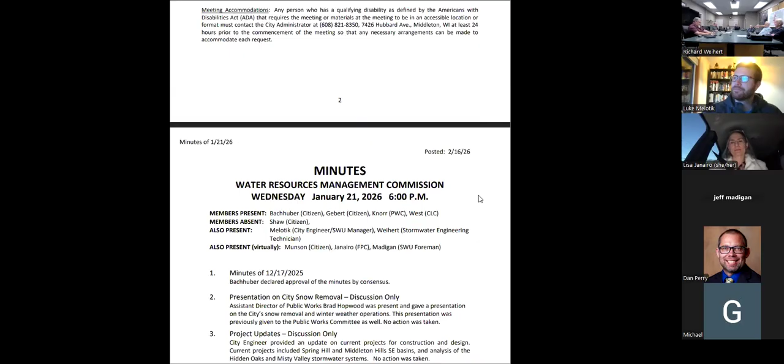Need the minutes approved. Any questions on the minutes? None? Then do you vote or just do consent? You can do consensus. Consent, approved.

Okay, so thanks, Luke. Sorry about that. Yep, federal funding, Graber Greenway project.

Yeah, so I don't really have much of an update here. I reached out to USDA, asking if we had any application materials or anything that they had on there that they could provide to me as background information, and they do not have anything. They pretty much just have it as a $500,000 earmark from Congress. So Brian, the city administrator, and I are meeting with USDA. I think next week sometime is when we have that laid out. So after that meeting, hopefully we'll have a better idea on what that funding looks like.

Nice. Okay, thank you, Luke. Send a check.

Okay, thank you, Luke. MSA has several reports, memos written up on various projects that they've written. We'll run through each one. And Jeff is here personally. Yes, please do, please do.

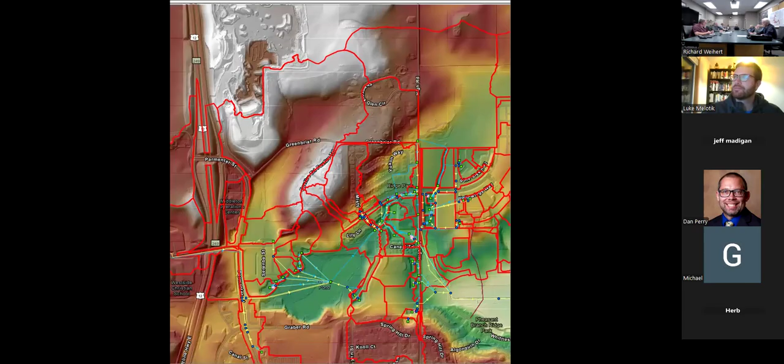And you want to just run through them one at a time? Sure. Good evening, everybody. Okay, looks like the Graber Pond model is first on the agenda. Yep.

So the intention here was to not get into a real in-depth discussion about the results or the model. It's more of kind of a progress update. I've got some figures here that are showing up on the screen. So we've created an existing conditions model - that's that first figure there, where you can see the red lines are the watershed boundaries of areas that are contributing to the pond. We've got a DEM file underlaid there to show the topography. And then the line work is representing watershed areas and the connectivity of where they're draining and how the system all kind of flows together.

So, just to orient, make sure we're all on the same page: the far left, you can see the north-south Highway 12. Far right is Pheasant Branch Road. It's kind of the extent of the east to west of the watershed. So everything in between there is draining to Pheasant Branch. That greenish blob there at the cursor is Graber Pond itself.

In the middle, running north and south, is High Road. So that's kind of the eastern side of High Road. I've called that the wetland, the north wetland area where the High Road culvert empties. And there's that kind of widened wetlandy area before the channel forms a little bit more definitively and then continues east through that agricultural area to Pheasant Branch Crossing. So our project extents are kind of what's dumping into that wetland area on the east side of High Road. You can see a faint yellow line going straight east from there to Pheasant Branch Road - that's in the model, but we're not at this stage concerned with that.

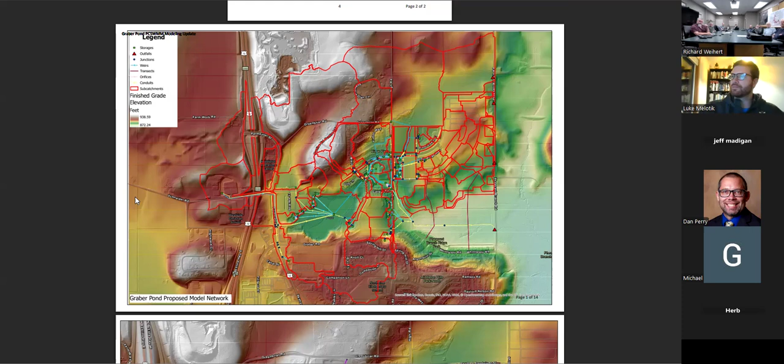If you go down to the next figure, this is the pipe network, and you can see some of those future basins based on the contours and coloring. On the east side of High Road, you can see the Red Tail Ridge basins shown from the topographic relief.

The dark purple area - the whitish, yeah, sorry. So this is just a figure representing the pipe network in the system that's been built into the full proposed condition.

So we've got the existing condition model rolling. I've got a couple of scenarios here that we've modeled to show some flood inundation.

Luke and I will be meeting with the DNR on Friday to discuss project permitting. It's been a long journey, the Graber Pond outlet idea with a lot of iterations.

My feeling is before we dive in and really roll up our sleeves on identifying and evaluating outlet configurations for the pond and then the Misty Valley Drive and High Road culvert crossing, I'd like to get a little input from the DNR on what the permitting climate or expectations would be. I don't want to go too far into a proposed condition process without getting feedback there.

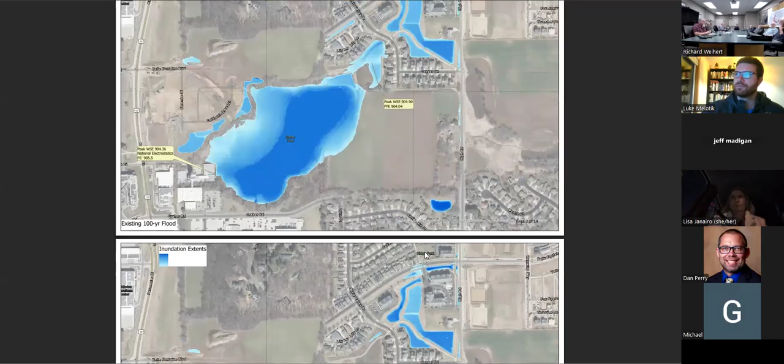So that's just a quick rundown of our approach to the existing conditions model, some flooding extents and flood elevations for different events under the existing conditions. Then next step we'll move forward with proposed condition modeling for the outlet structure and the two culvert crossings. I think when ER or maybe MSA did a previous rainfall runoff model, they used a continuous model for 10 or 15 years. Do you plan on doing something like that later on?

I would love to. In conversations with Eric, I'm not aware of that. So maybe that was not MSA. It must have been ER that did it. It was probably 10, 15 years ago. Okay, that long ago? I'm not sure. I was going to guess sooner, but I'm always wrong on that.

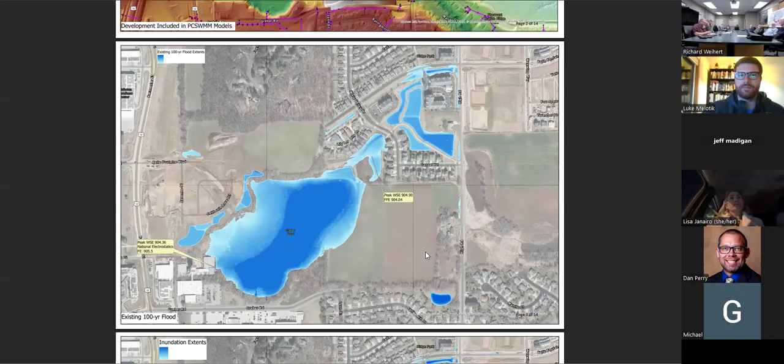Okay, any more questions on that Graber analysis? It's not a completed project yet. The whole point of this is to look at alternatives for the outlet structure for the pond and what impacts it'll have on water surface elevations. Right. And then that will ripple downstream to modifications needed for the Misty Valley culvert, taking a look at what happens to the Misty Valley existing stormwater system and those basins there now, and then ultimately to the High Road culvert crossing.

Lisa, are you able to hear Jeff all right? Yes, I can hear him just fine. Okay. All right. Any more questions? We'll move on to the Misty Valley topic.

Okay, the next memo summarized our soils investigations for the Misty Valley infiltration basin and the ditches within Belle Fontaine Boulevard. The south side of Belle Fontaine has been undeveloped, and there's a series of ditches. So we did some test pits to assess the infiltration rates for those ditch sections and the infiltration basin.

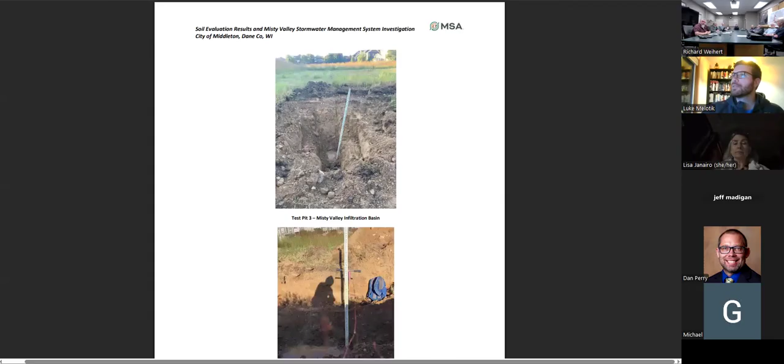So then we also looked at the soils in the Misty Valley stormwater management system, the infiltration basin, and also the sedimentation basins. We found that the infiltration basin has about a 6 to 9 inch layer of tight clay soils that have accumulated. It's 20 plus years old, so it's not a great surprise, but there is a good sand layer that was placed when it was originally constructed present underneath. And you can see in the photos a pretty distinct separation in those soil layers.

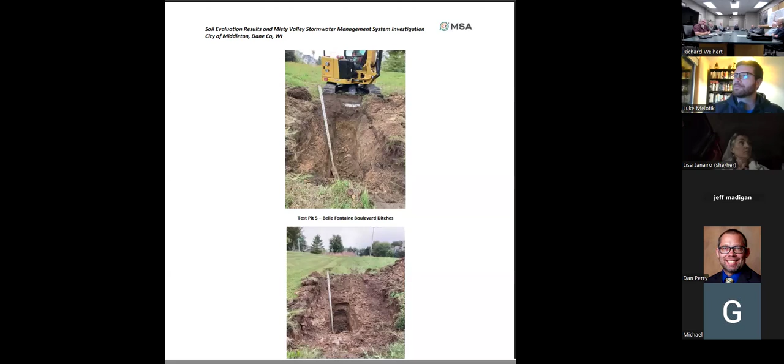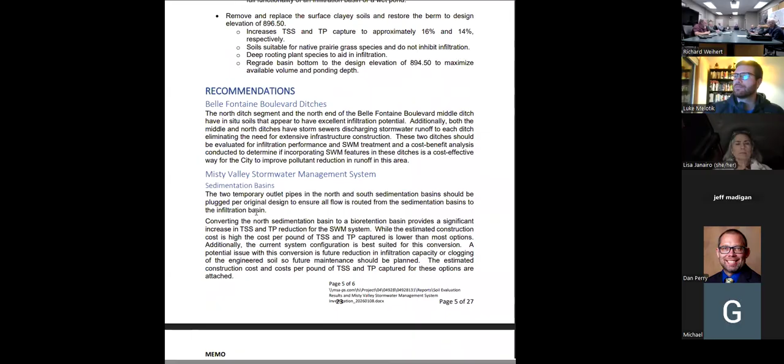So that was the first step, to assess the condition of the soils in this space. From there, we looked at identifying and evaluating potential improvements to that stormwater management system to increase its functionality and performance. We started by looking back at the original stormwater plan for the Misty Valley development and the performance documented in it. Then in 2016, MSA did a water quality plan, so we had some old modeling from there and looked at the performance of the system as a whole,

and specifically the infiltration basin. As part of our evaluation, we had a surveyor out there getting bottom of basin shots and top of berm shots to confirm the topography and size, and also check the outlet features. The biggest thing that came away from that is there's an overflow berm that separates the infiltration basin from the downstream dry detention basin. So if you go to the big map.

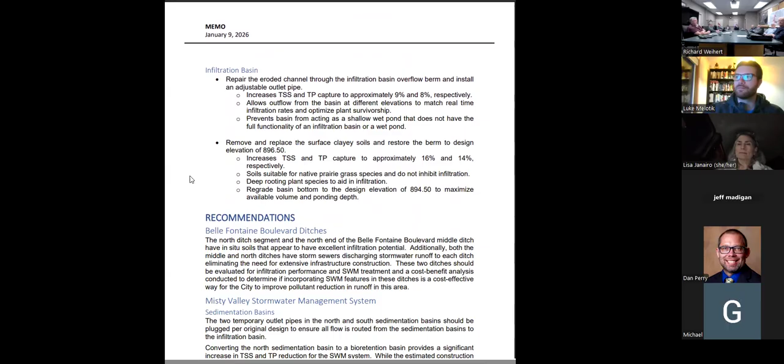So the Misty Valley stormwater management system is comprised of two sedimentation basins, or forebays, if you want to call it. Keep going, Luke. The flow comes into those.

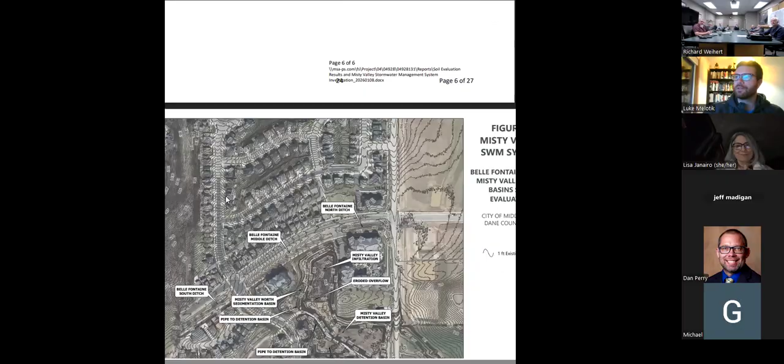Sorry, go to this. Yeah. I was thinking we're controlling that screen. Luke, it's... you're driving.

So there are two sediment basins, and then they discharge to an infiltration basin. And then the infiltration basin overflows to a dry detention basin, which has an outlet structure that dumps it to the west ditch of High Road. And then the culvert carries it across. So it's a large and detailed regional system.

The berm, as I was saying, the berm that separates that infiltration basin from the dry detention basin has basically a channel that's been eroded. So what's happened over time is that basin was originally designed to hold back water up to a couple of feet, allow it to percolate through and infiltrate. Now it doesn't have that same ability to hold back water. So when water comes into the infiltration basin, pretty much soon thereafter it just continues through to the dry detention basin.

So the infiltration performance and the sediment reduction performance, and total phosphorus as well, it's worth noting, being an MS4 community, that's reduced. A minor thing is that there were some temporary pipes that connected the sediment basins to the dry detention basin during construction that were called for to be plugged, so that all that flow from the sediment basins would go into the infiltration basin where it could receive more treatment. Some of those were left in place, so there is some amount of flow that comes into those sediment basins that goes directly to the dry detention basin. So it's never routed through the infiltration basin and given a chance.

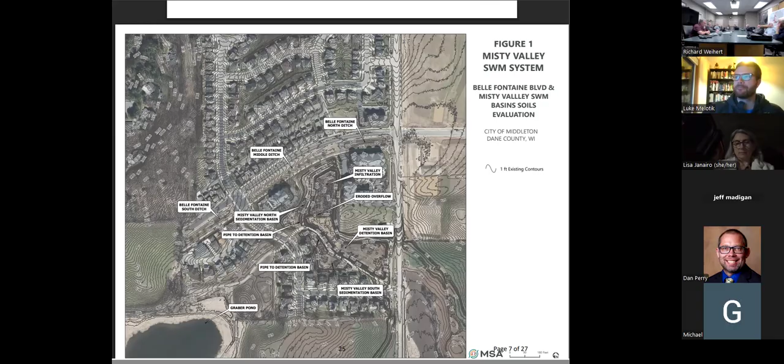So we looked at what's the best bang for the buck as far as getting better performance out of this regional system. The analysis showed that converting the north sedimentation basin to a bioretention basin provides the best improvement to the system, and the cost per pound is at the lower end of the spectrum.

The process would involve taking out the clay soils that are present in there and replacing them with engineered soil, outfitting it with an underdrain. So you have your kind of standard bioretention basin. So you get your TSS treatment in that sediment basin, and then it's routed to the infiltration basin. That's the biggest bang for your buck and the biggest increase in TSS capture for the alternatives.

Another option would be to convert that to a wet pond, which gets a similar level of performance, but it's not a great shape for a wetland feature. My fear is that eventually you're just going to wind up with one big cattail. So not an actual open pond.

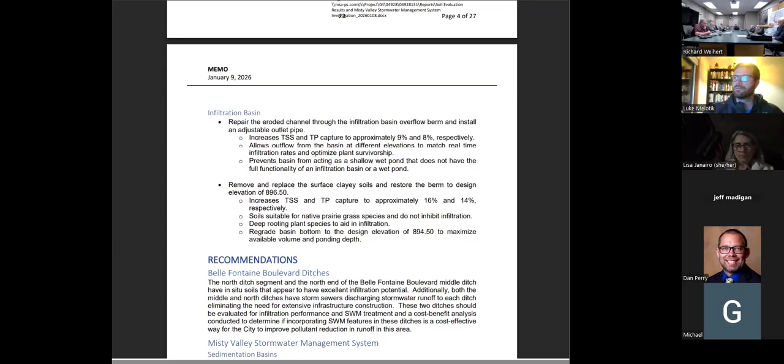What we want. Correct. Kind of piggybacking that is simply doing some maintenance and repair of that infiltration basin berm. Restore it to its design elevation so that it holds water back longer. And then you've got some more ability for that water to infiltrate in. The caveat with that is that layer of clay soils, the tighter soils that's developed on the surface of the infiltration basin, is going to inhibit some of that infiltration ability. The water is going to struggle a little bit to get down to the nice sandy layer that's underneath.

So there's kind of two approaches to dealing with that. I think the best approach would be to outfit that infiltration basin with an actual outlet structure. Right now, there's no way for the water to get out of there other than to come up over that berm into the dry detention basin. It just invites the erosion. Pardon me? Yeah, it just invites the erosion. Yeah.

So if you outfit it with more of your standard outlet structure, with a pipe orifice and overtopping ability, then you're focusing that water, routing that water into the dry detention basin in a safer manner. The other thing is, because we wouldn't know exactly how well water that's now being held in that basin, how well it will infiltrate.

We could outfit it with an outlet that has an adjustable invert elevation. So if it turns out that the soils are holding water longer than we thought, to prevent drowning out the vegetation that's in there, we could lower that outlet orifice so that the infiltration could keep up and we're not holding water for days and days and days.

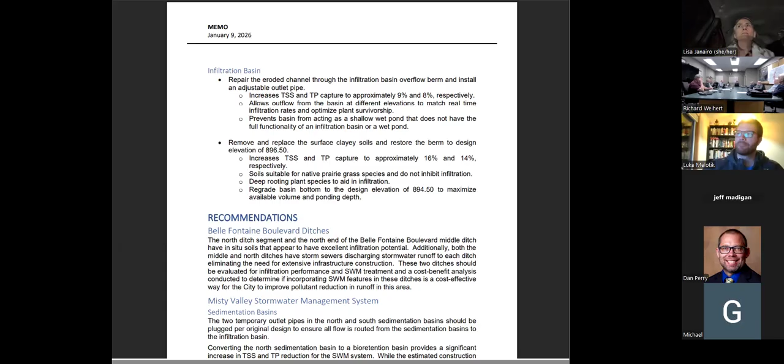So there are levels of improvements on the table that have varying levels of performance. But again, I think the biggest, most cost-effective option is to convert that north sedimentation basin to a bioretention basin. And then I also recommend that berm and outfitting the infiltration basin with an overflow structure. We're going to keep getting more sediment in there over time. It just has to have maintenance.

I don't know why so much accumulated there. Was there never a plan for us to dredge it and take it out? I don't think so, but that was a pretty steep site too, when they were building up the hill to the north. So a lot of it happened during construction probably. Yeah, that would be my guess. I don't know if it was over-excavated enough, but if it's clay soil, it doesn't matter. It just got there. To some degree, I think we just have to get it out to allow better infiltration. Probably hasn't had any maintenance since construction. Yeah. I guess I'm not that surprised, that construction went on and on.

Right. This is a city-owned facility? I believe those are. That's one of the last ones we did recently. Those are owned by the city, right? Yeah, that's what's going to be verified. These are all municipal properties. Yep. All the Misty Valley basins are city.

In your current contract scope with MSA, how far do these recommendations progress? I don't want to call it design, but pre-conceptual type stuff, or what are we talking about? I think they go through to design plans. Oh, it does? Yeah, it goes through full design, I believe. Okay, good. Possibly bidding. Yeah, I think so, all the way to bidding. And if this progresses, we're talking 2027 for possible construction?

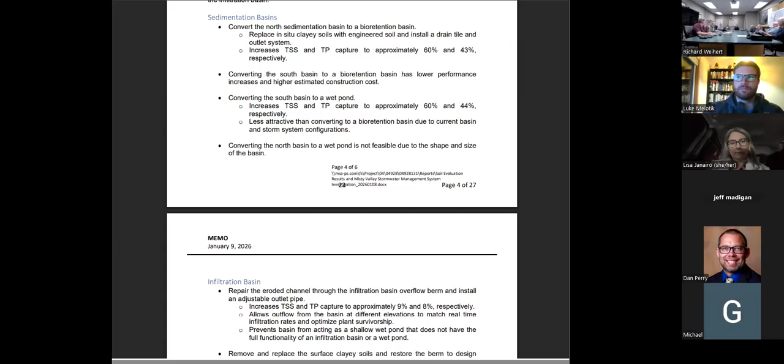Well, are we looking at approving something tonight? No. Because I looked at that table for recommendations and the cost isn't all that much. Yeah, that was a preliminary exercise to see how those costs compare relative to the different options versus a well-developed estimate. They don't seem real large, so. And I think looking at the cost per pound is valuable as well.

There's less infrastructure being added to it, so it's moving dirt and replanting. Yeah, the engineered soil is a big cost. Right. Was there any look at taking what we have out there now and, just for peak flow and flood control purposes, maximizing storage for that purpose alone? Is that part of the analysis?

I didn't look too closely at that because you're kind of boxed in, right? It's developed all around there. So the prospects of enlarging a pond or basin, trying to get more volume out of it, I don't think it's gonna be there. I didn't see a lot either, but I was just curious. Yeah, that's kind of a byproduct of improving the infiltration performance. You'll get some volume control and some storage by removing material, so there's incrementally some benefit there.

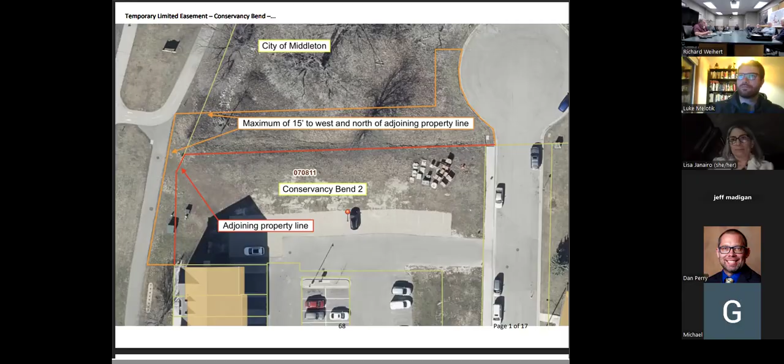T-Wall needs to explain in detail their use of that land and the safety issues involved in the construction, because of how close their building is coming up, so we can understand that part of it. I'll give him a chance, I promise. Kevin's here, I'm familiar with it. I want to know if any other members have general questions before we get to more detailed discussion. I'd like to see a general presentation of what we're really talking about. We're looking at the nitty gritty without seeing the big picture.

Okay, we need to hear. Do you want to give an overview? Yeah, I'd love to. I'm sorry, I need to introduce Taylor. Taylor Brengel, T-Wall, General Counsel, Executive Vice President.

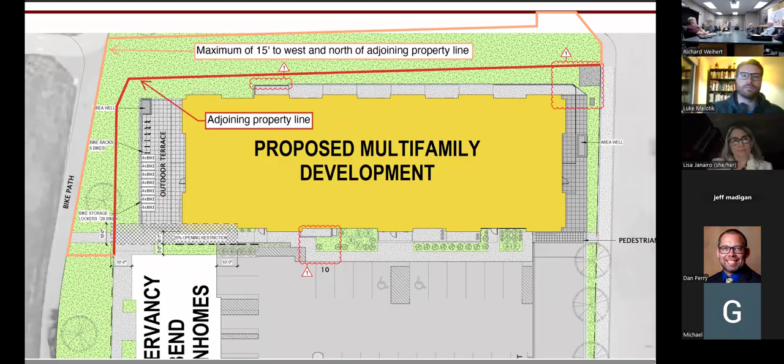I will say, since the CLC meeting at the end of January, I've been working with Kevin and Matt Fleming on the easement to come back with hopefully something that's agreeable and reflects cooperation between the city and the developer.

I think it's worth noting, I've got boards. You guys probably can't see these, but I know, Luke, you've got some maps up too.

I think the point of this is to let you know that we're working with city staff, city attorney, and public works city engineer to see if there's a way to allow this. We talked to our contractor again, as Lisa pointed out. Could we do it without this easement? Yes. Would it enhance safety, erosion control, and ease of convenience to have this easement? 100%, no doubt.

So the idea would be the tightest area between the building and the property line is about 4 feet, the biggest area is about 10 feet. Edge of building to property line, correct. The tightest area is just a little spot, and you can see it on the screen that Luke's showing you right there. That's the 4-foot section. Otherwise it goes out to 10, so it's sort of in the middle of the building.

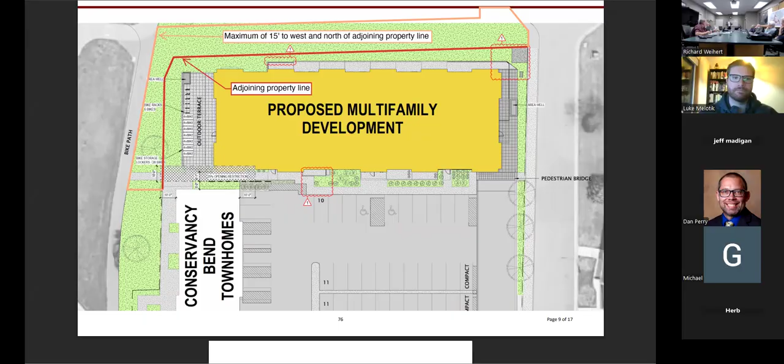My question is, is that orange fence approximately the property line? Yes, approximately - we put it along there.

Is that tree going to survive that close to the building if it's 3-story, 4-story? Three stories. Is that tree supposed to not interfere with the side of the building? It's already over the property line.

Curious - so in preparation for construction in the winter of 2020, late 2024, early 2025, city crews went out and did reduction cuts on the south side of that oak to bring it to the property line or thereabouts.

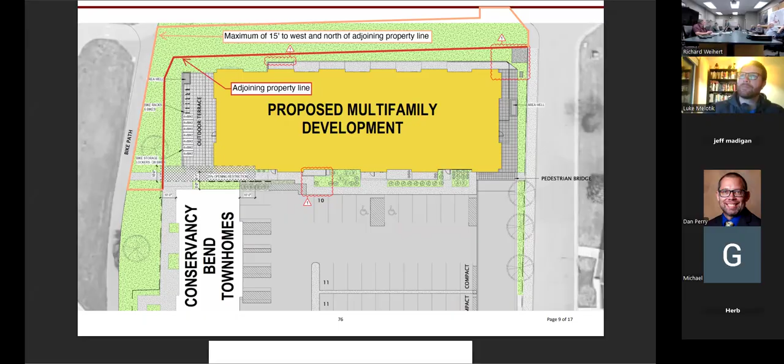Okay, we've heard the concerns, we've expressed our opinions. Appreciate you coming out. Thank you, very helpful. Very clear. Thank you. All right.

Renew the Blue Council update. Yes. Pat, is everyone familiar with what Renew the Blue is? I think you talked about it before, but okay. Clean Lakes Alliance is organizing a group of people, mainly a city administrator or mayor and another person from basically all the areas in the county, to help on improving our clean lakes.

One emphasis is going to be on reducing the phosphorus, with the goal of hopefully getting rid of cyanobacteria, blue-green algae, E. coli, all the pathogens going in, so that we can clean up the lakes. Also involved is getting the county to sample the lake frequently, not once a week but every day, and process those quick enough so they can close the beaches quickly. This is back to what I did in my first job, and they haven't specifically said how they're going to manage this, since it's a nonprofit organization, Clean Lakes Alliance.

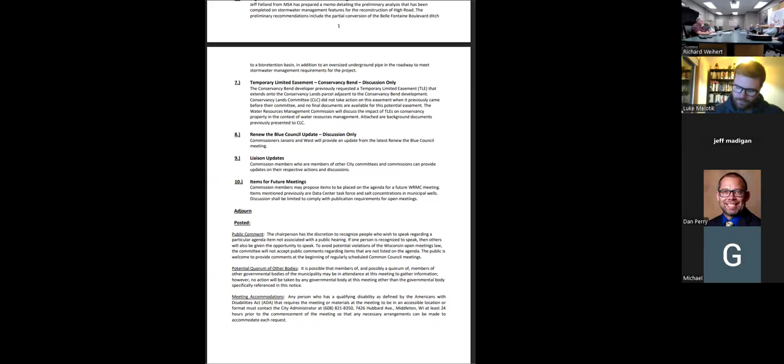Yeah, but why do they have to take it up? They're the water utility. Well, I understand that, but we still could have concerns and talk to the person in charge. It's still, I think, probably under study at this point. I haven't heard anything. They're discussing that, and it'll come to us: this is what it's gonna cost. They are looking at it. These are the existing wells, either casing or replacing. That's what you wanted to know.

So when it does get decided or information is provided to Public Works, you will report that as part of your liaison. Sure. Yeah, I wouldn't mind having the guy come and talk to us directly, just briefly. I'm not opposed to that, but it sounds like he's in the middle of generating information so he can come and talk. We'll get him to explain why, and cost comparison and capacity. Which is key also. Okay. Anything else? Future topics?